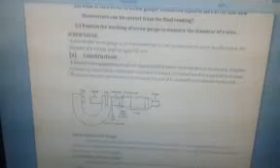A simple screw gauge consists of a U-shaped metallic frame, with a stud at one end. A hollow cylinder has a millimeter scale over it along a line called the index line, parallel to the axis. The hollow cylinder acts as a nut and it is fixed at the end of the U-shaped frame opposite to the stud.

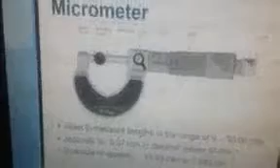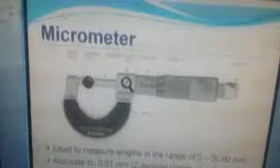This is the picture of the micrometer screw gauge. As we see, there is a U-shaped frame. This is the U-shaped frame. This stud is fixed, which is called the anvil face. And this is called the spindle face, which moves on both sides with the help of the ratchet.

When we rotate the ratchet, the spindle face will move. This is the nut. When we put the object in the spindle face, we will lock it. This line is called the index line, and it is called the sleeve.

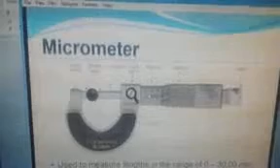There are values written in millimeter: 0, 1 millimeter, 2, 5, 10 onward. This circular scale is called the thimble. When we rotate the ratchet toward the right side, the value will decrease in the thimble and the sleeve.

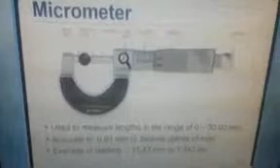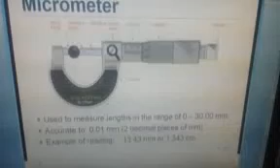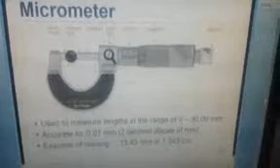Now, the micrometer screw gauge is used to measure length in the range of 0 to 30 millimeters. Its accuracy, or least count, is 0.01 millimeter. It can accurately measure up to 0.01 millimeter. But in the case of the vernier caliper, we can measure only 0.1 millimeter.

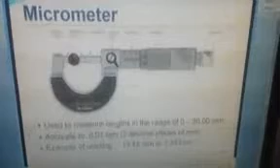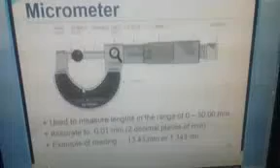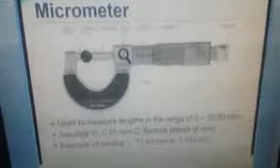Understand? Next is the pitch of the screw gauge. What is the pitch of the screw gauge? As the thimble completes one rotation, the spindle moves 1 millimeter along the index line. This is because the distance between consecutive threads on the spindle is 1 millimeter. This distance is called the pitch of the screw on the spindle.

If you don't understand: if we rotate the ratchet and it completes one rotation, this is called the pitch of the screw gauge. If we rotate the ratchet completely in one circle, that is the pitch of the screw gauge, and the pitch of the screw gauge is 1 millimeter.

Now, how do we calculate the least count of the screw gauge? The least count of the screw gauge can be found by the formula: pitch of the screw gauge divided by the number of divisions on the circular scale. As we know, the pitch is 1 millimeter, and the number of divisions on the circular scale is 100. So the least count of the screw gauge is 0.01 millimeter.

The least count of the screw gauge is 0.01 millimeter. And in the vernier caliper, the least count is 0.1 millimeter. So there is a difference of 10 times.

Now come to the next topic, that is the zero error of the screw gauge. What is zero error? As we say, if the line of 0 coincides with the line of 0 of the scale, then there will be no zero error. But here, how can we calculate the zero error?

If we close the spindle and stud of the screw gauge by rotating the ratchet in the clockwise direction, and if the 0 of the circular scale does not coincide with the index line, then there will be zero error. If the 0 of the circular scale coincides with the index line, then there will be no zero error.

Here again, there are two types of zero error: positive zero error and negative zero error. If the 0 of the circular scale is behind the index line, in this case it is called the positive zero error. We can correct it by multiplying by the least count, and then subtracting it from the measured value.

Now, how can we find the diameter of a wire or solid cylinder using the micrometer? The diameter of a given wire or cylinder using the screw gauge can be found as follows. Close the gap between the spindle and stud of the screw gauge by turning the ratchet in the clockwise direction. Now note the main scale as well as circular scale reading to find the error, and hence the zero correction of the screw gauge.

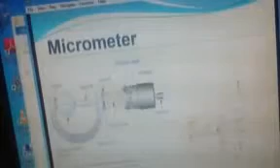Open the gap between the stud and spindle of the screw gauge by turning the ratchet in the anti-clockwise direction. Place the given object in the gap. Turn the ratchet so that the object is pressed gently between the stud and spindle.

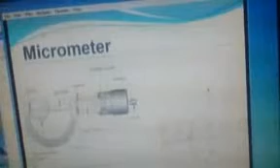Now note the main scale as well as circular scale reading to find the diameter of the given wire. Apply zero correction to get the correct diameter of the wire. Repeat these steps 3, 4, or 5 times at different places on the object to obtain the average diameter.

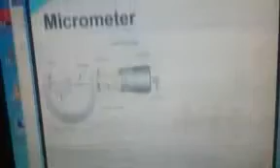As we see in the figure, the object is placed between the anvil and the spindle. Now, how can we calculate the value? Here we see the main scale: it reads 5, 6, 7, 8, and between 8 and 9 this line is present. So the main scale reading is 8.5 millimeter.

Main scale reading is 8.5 millimeter. Understand? So the main scale reading is 8.5 millimeter. Now, what is the reading on the circular scale?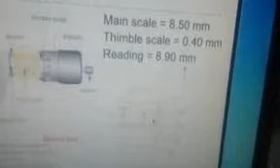Here we see that this line is coinciding with the datum line. Its value is 40. So the thimble scale reading is 0.40 millimeter. Why 0.40? Because 40 multiplied by the least count, which is 0.01, gives 0.40 millimeter.

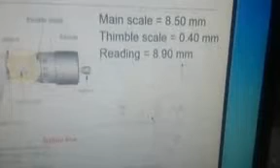So the thimble scale value is 0.40. So the diameter of the object, we will add it: 8.5 plus 0.40 equals 8.90... wait, 8.90 millimeter. This is the method to find out the diameter of a small object with the help of the screw gauge. Thank you, have a nice day.